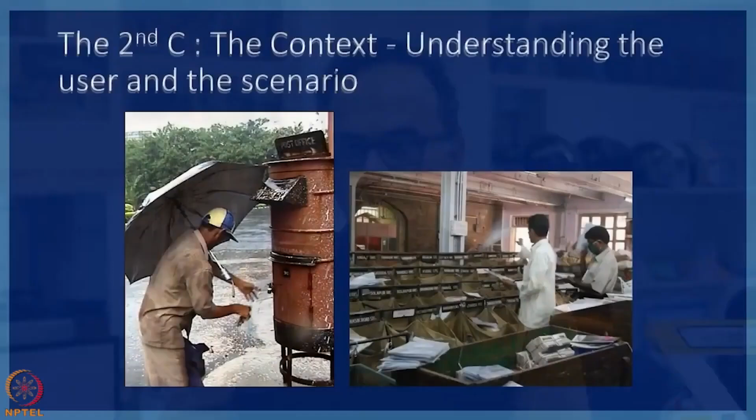The second C is the context. Like the way I was talking about the context of L&T, the context of Midco, the large enterprise of Larsen & Toubro, the type of synergy they have, we need to understand context. And when I went to India Post, I was shocked to see the context. The lowest division clerk is the one who opens the post box. Most of the times the lock is rusted, and they use a close by stone to hammer the lock so that the rust comes off and the lock opens.

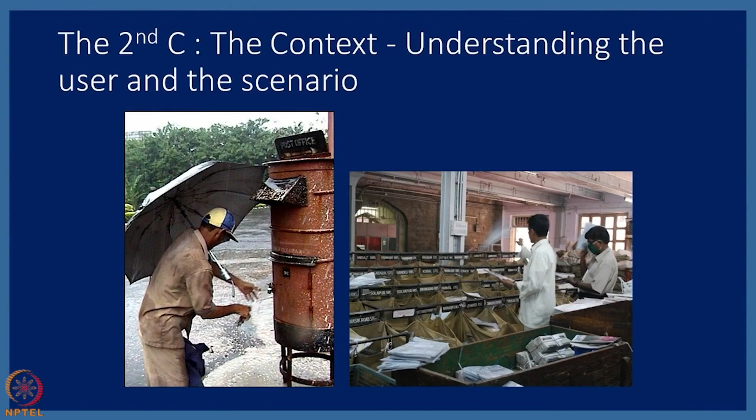You don't need rocket science to study this. As soon as we studied, we said the lock should not rust. We went to Godrej and got a rust-proof lock. It doesn't take any effort. So those types of aspects are very critical. So the second C is the context, where we say that the context is understanding the user and the scenario. The user and the scenario becomes the important second C, the context.

The third C, which is the comprehension, is arriving at design insights. This is very, very important in design, where you have to arrive at design insights and why such a thing happens. Why do letterboxes rust? Why do they take letterboxes? Where are letterboxes manufactured? Why do they use raw material which is bad in letterboxes? What are the costs involved in the letterboxes? What are the quality standards they're using?

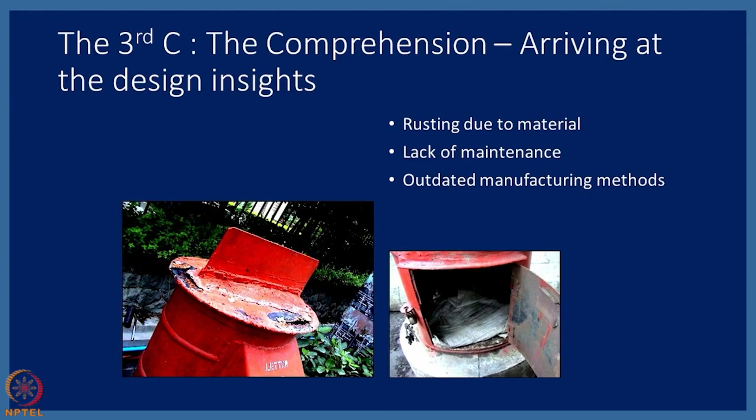A lot of issues are there. And when water ingresses the letterboxes, what do postmen do? Because you can actually lose your address on the letterboxes, and it's quite an important thing. So the design insights become our third C, the comprehension.

And the fourth C is the check. So once I've understood the concern, the context, and the comprehension, where I've done thorough analysis, thorough design, data collection, you can come up with the check, where we make a blueprint for design. I now know where to go. I need to have a rust-proof lock. I need to use materials which are rust-free.

I need to use materials which are contemporary. I have to have robust manufacturing, because people vent their anger on the letterboxes in the field when there are riots. So I need to have a robust manufactured letterbox. I need to also make the letterbox user convenient, where we can see how the user is.

Even a small girl should be able to post a letter even if her height is small. Then we also need to have a small box and large box. We call it the modular design. And then last but not the least, though this was not a brief, we said you have to create a unique identity. It has to look good. So the unique identity also is a very important checkpoint.

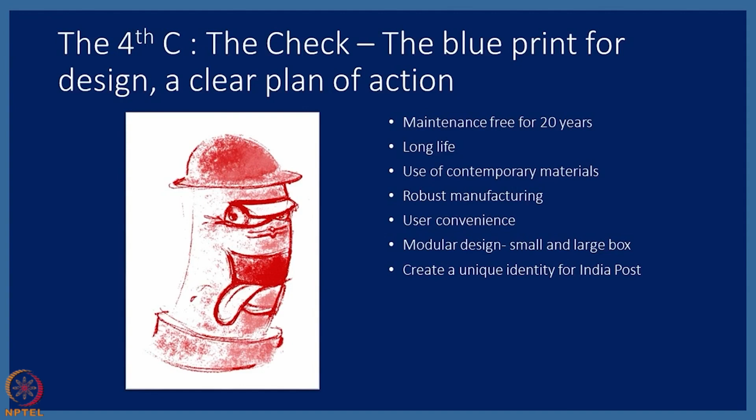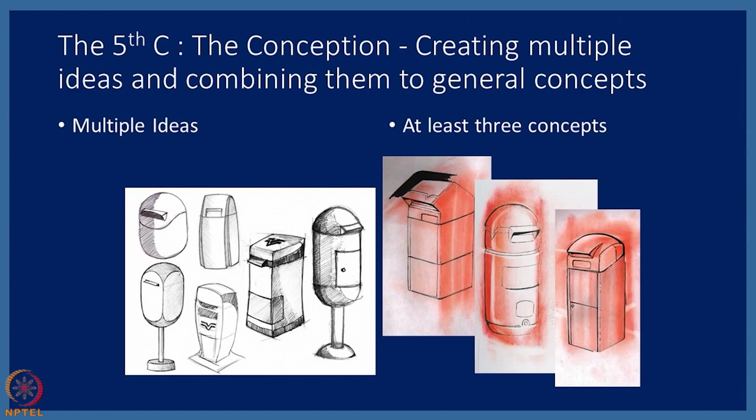So once your conception is ready, you go to the 6th C, that's the crafting. And from the innovation pivots, we had to go to the best manufacturing. I didn't even consider that I can go anywhere else. Our whole design journey was exactly from the point of view of using the best materials, using the best technologies.

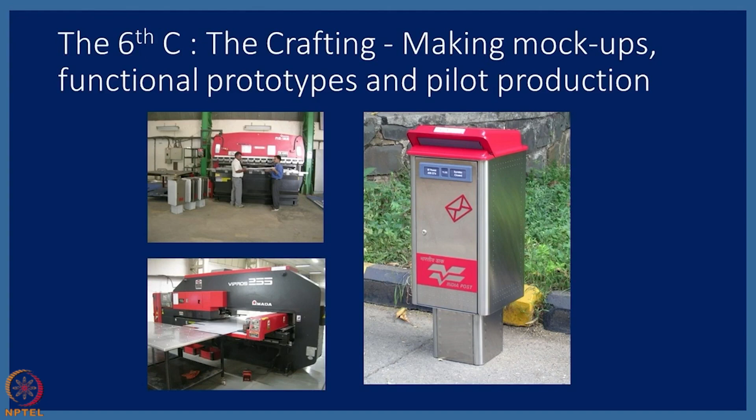And we were very fortunate that during the 150-year celebration of India Post, the secretary and the ministers actually inaugurated our box as part of the connection, which is the 7th C. You need to connect back with your user. That's the very important aspect in innovation. For example, the oval pump couldn't go to mass production, so innovation is not complete.

Whereas in the Z-line pump and the bullet pump and the show fill, it became a runaway success where large quantities are in the field and the users are delighted with the product, then we can say that innovation has happened. So here, for example, we have the 7th C, which is the connection, and it went through. But a very interesting thing happened. As soon as they launched this as part of the celebration, they gave us an order of 200 numbers and asked us to produce it. That was a very big challenge for us.

So we actually collaborated with 4 companies. We collaborated with Hilti for the bolts. We collaborated with Godrej for the locks. We collaborated with GE Plastics for the Geloy material, which is the top in red color, and we collaborated with Jindal to work on the stainless steel, and the manufacturing was done by Jindal Architecture.

And we used the best design. You can see, I've become an expert on sheet metal because of my L&T experience, and we had some beautiful design where you don't see any embellishments, you don't see any welding marks, and the product became an icon for their 150 years. And after the 200 order came, we supplied these 200 all over the country.